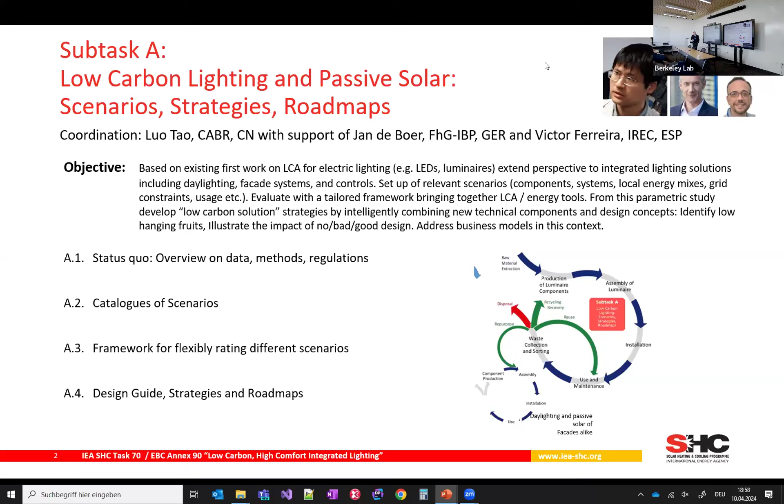That goes along with, out of that, we want to have a framework for rating scenarios, and then of course disseminate that in a design guide with strategies and roadmaps. So let me quickly elaborate on how we want to get there.

First of all, we're here in a teaching and research facility. I don't want to go into teaching here, of course, but just some words because they pop up all the time again - the life cycle stages of embodied energy, what we're talking about here.

This is the production and also the construction phase of the products, but also then the end of life, the reuse, the transport, the waste disposal, and so on. So that is what is added to, if you only look at the energy consumption of a building, which would be part of the operational carbon thing.

Now we're also looking at what it takes to produce the materials, to bring them to the construction site, to the assembly, to the fabrication halls, but then also what it means when operating.

We also have some terminology which is popping up - cradle to gate, cradle to site, cradle to grave, end of life, cradle to cradle, the reusing - and within that we're looking at the different stages.

So not only the operational, but also what does it take - how much CO2 or energy does it take to produce the products, to assemble them, and so on. So that is the change of things.

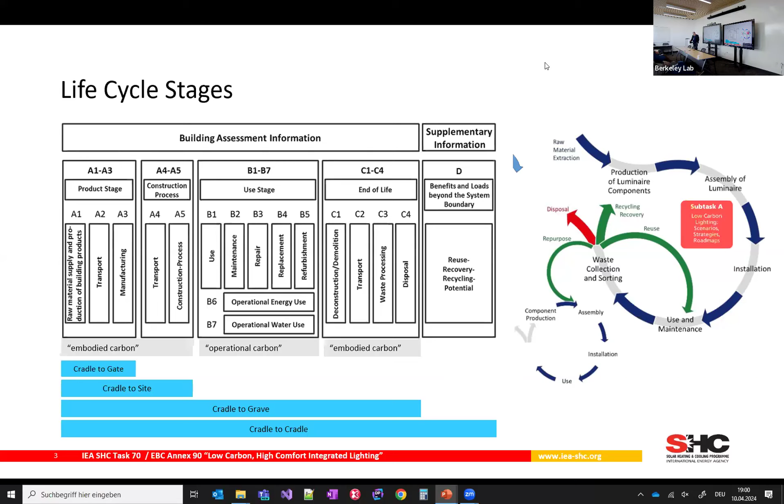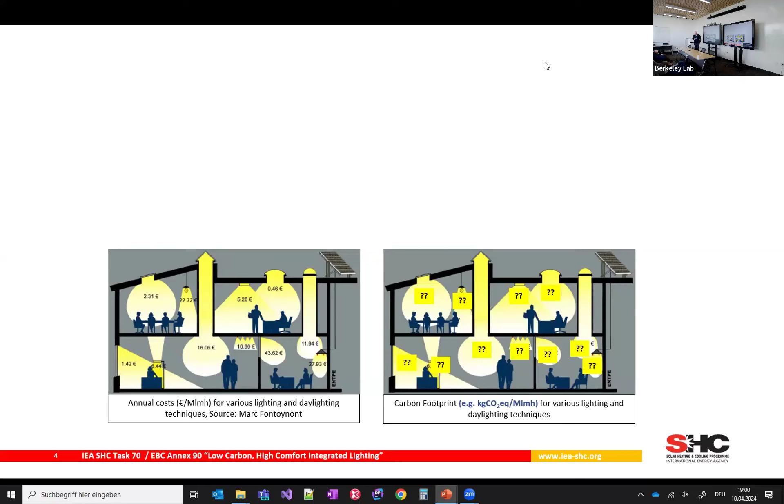So in an ideal world, what we have here, if we talk about energy and costs, we're quite good at that over the years. There's a nice chart comparing different options for daylight contribution to spaces, associated with some rough costs, just to give an idea of what other options are there, and what to think about. In the end, we want to have something similar, just to give people ideas what else you can do in terms of daylight, again with a focus on CO2 or global warming potential.

But the thing is, it's not that easy. If you only look at an EPD, which does not say anything about how that product is used or what's happening in the building, there's a lot of decisions and paths you can take. It's very hard to determine the impact of products, and EPDs are not the way, at least currently formulated, to evaluate what that means for the space. Also, a decision between daylight and electric lighting, you can't do that on an EPD level, so you have to change something like that. That is what we want to get at in the end.

So again, I mentioned that survey done to get a first overview about the status quo. We received 15 surveys back from different countries. We wanted to get an idea how we're standing in terms of methodology, data, and general overview. We found out it is very scattered, very different. We found a lot of databases, some free, some paid, but they all had different scopes, different meanings, different settings, and you can't use either one or the other because they are not comparable to each other. So there's a lot you have to know what you're doing.

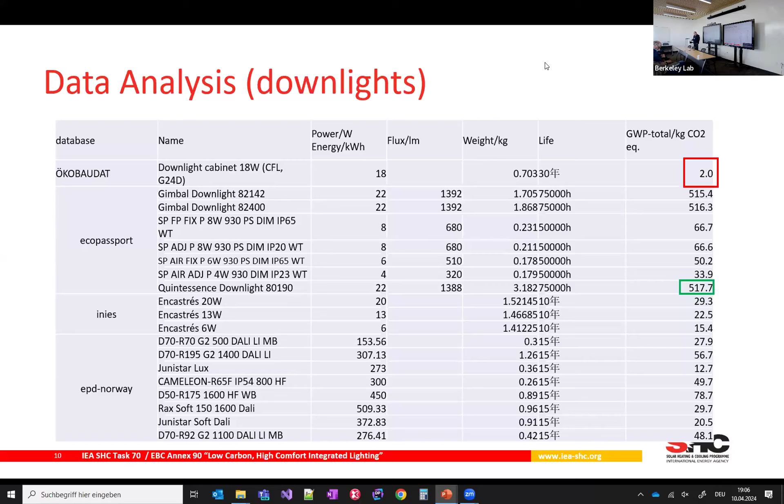Again, you have to look very much into detail at what you're looking at here, and that's something we want to address - maybe to get that more unified, or get different functional units to assess the LCA, or again bring it more to a design thing.

We only have very limited data available, especially for lighting products. EPDs are coming, but they're not the only solution to everything right now—there's some movement at that stage. But we also need to look at whether we need EPDs, or EPDs for groups of products or types of components.

Not that at the very first design stage you're already having to say you want this project or that product to have some flexibility here. How do we evaluate the level of carbon emissions, not only on the product side but also on the system side, in the building, in the use in the building, which is a very key point.

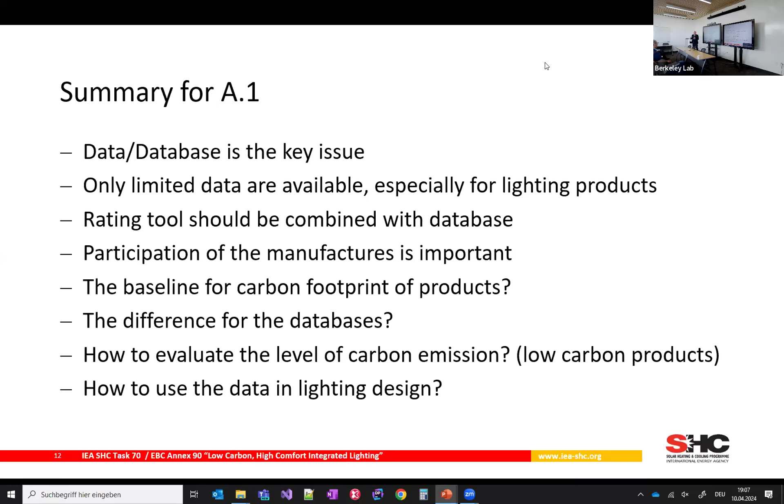We also have to see what it means to produce those EPDs if they are crucial—what does that mean for the manufacturers? There's a lot of stress right now on them to put out those EPDs, especially for smaller companies. That's probably an even higher burden for them, but it has to be done.

We'll have all of that combined in a report, which should be available fall of this year, just to see again what I've briefly told you right now in a more elaborate way. But that brings me to the next thing, and that is almost everything I want to say here.

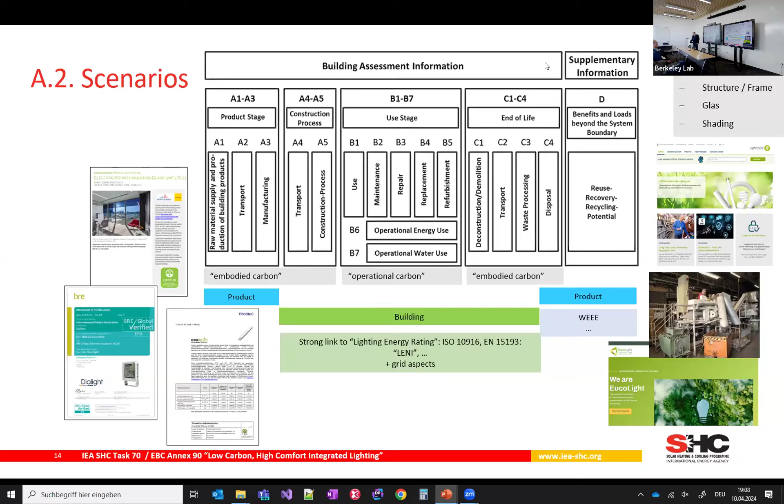That's the next stage, where we think about going from the product stage into what is happening in the building. The way to do that is we want to link some scenarios. So we look at now probably new functional units, which make it possible to evaluate electric lighting versus daylighting.

Electric lighting is way easier than the incorporation of daylighting, but look at those functional units, like the rating—the unit of rating, so to say, in terms of energy, that would be kilowatt hours per square meter per year—to break down the CO2 impact on new functional units, not square meters of glazing, but installed wattage of electric lighting or something like that.

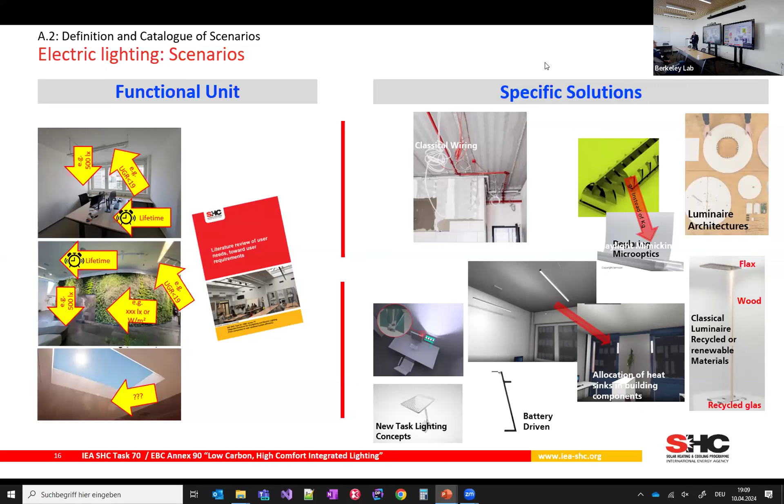So how to do that? We want to look at different types of buildings, office buildings, and then look at different materials and bring them together—those functional units with specific solutions—and see what we can learn out of that. That's our next step, in order to find rating criteria and functional units that are more suitable than just square meters or pieces of luminaire.

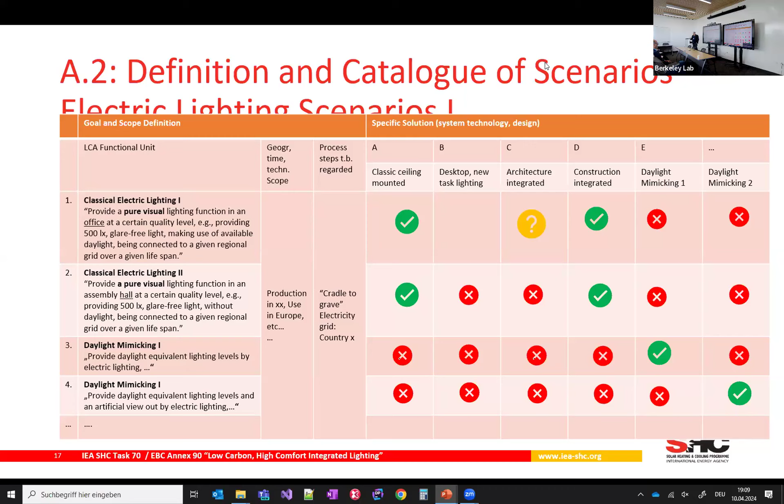So we want to look at electric lighting, but also daylight, the use of daylight, to be able to bring those together, and to be able to evaluate the use of one or the other, or together, not only in energy or daylighting simulation, but also from a CO2 global warming potential perspective.

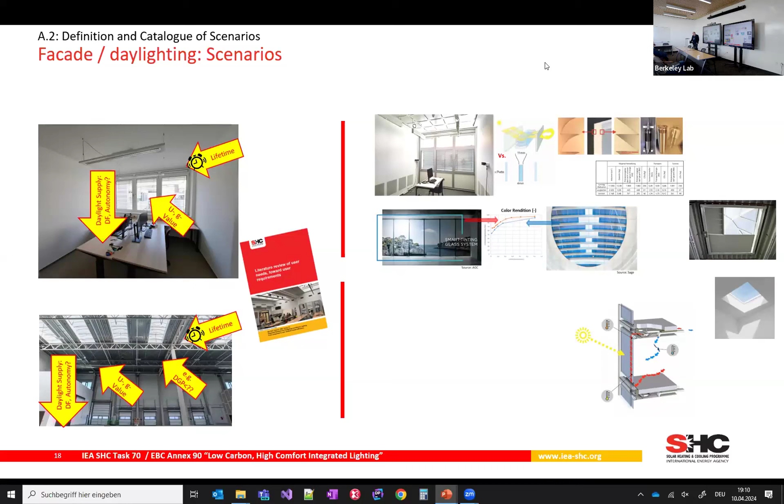Daylighting—again, electric lighting is quite easy in that regard. Not that it's easy, but it's easier than the incorporation of daylight. That's, of course, also one of our ideas and things we want to look at. And that brings me to the end of the short presentation of what we're doing in subtask A.

And I'm now very happy to introduce one of my colleagues here, Marvin, who will tell us something about sustainability at Hella.

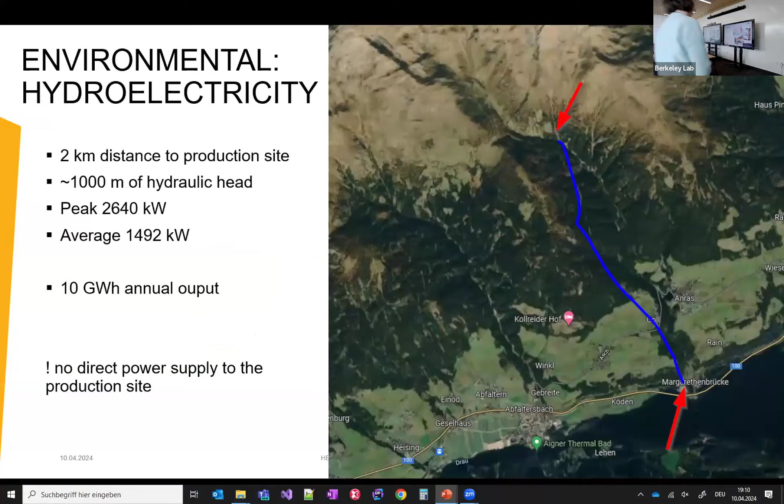Do you have time for a quick question? Okay, maybe later. You talked about that—you didn't go into the roadmap in detail of the strategic strategies, right? Yeah, I'm just curious, have you thought about, besides talking about the daylighting and lighting area, how that interfaces with the rest of the building, putting it in context about reaching beyond just this area and explaining how critical it is to work with other parts of the building? Have you thought about that as part of your road mapping strategy?

Yeah, absolutely. That's the key piece actually—not only looking at the lighting itself, but also the integration of lighting into the complex system of the building, and the influences back on heating, cooling, and so on. Another phrase we've been using in the U.S. a little bit is, why do windows matter? Trying to get that messaging out, why it's so critical.

That's exactly what we're looking for. We're not there to promise that we will achieve that, because it's very complex. But that's what we exactly try to do with the scenarios—to look at exactly that, and then also incorporate comfort, because lighting is all about comfort. But how does that comfort work in terms of the building as a system, as an energy system, as a functional system? Thank you.